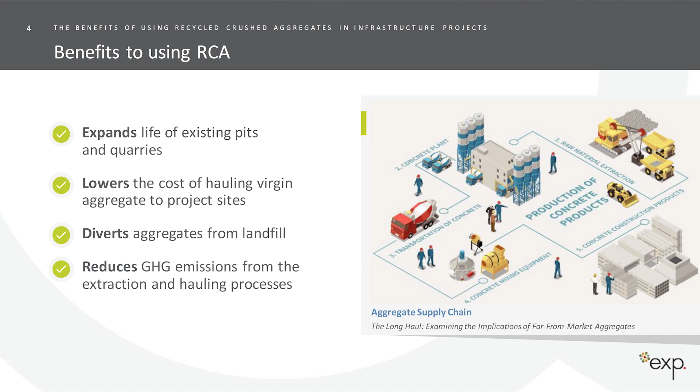So let's first talk about sustainability benefits. You had already pointed out that multiple articles discuss the limited amount of natural virgin aggregate. So whether it's the impacts of a quarry being shut down, or a couple articles I read about non-renewal on leases, so they're just not going to renew the lease on the quarry. But the fact is that no more material could come from some of these pits and quarries, or that we do have to source them from farther away, which is going to increase the transportation costs.

So those same studies actually pointed to the availability, and it's a lot closer for the location of crushers or suppliers who do have RCA readily available to transport to a construction site. So now you have this recycled material. It's at a location that is much closer to your site, and that gives you multiple paths to reducing those critical greenhouse gas emissions for the full life cycle of the material and the process.

So we also add to the list of benefits diverting aggregates from the landfill, because usable quality construction and demolition waste, so that's C&D waste, we really need to redefine that when we're talking about it in this context, because sending materials from a demo to a landfill is essentially sending aggregate to a landfill. So we have to really redefine that when we're talking about this in this initiative.

So here's where I... within the sustainability world, you hear a lot of talk about greenwashing, and it's because people put boundaries around things, and they'll say, well, I'm net zero for this little boundary. But it is important to understand the boundary in the context of how we present these results. When we get to the very end, you'll start to see what the conservative estimate for savings is.

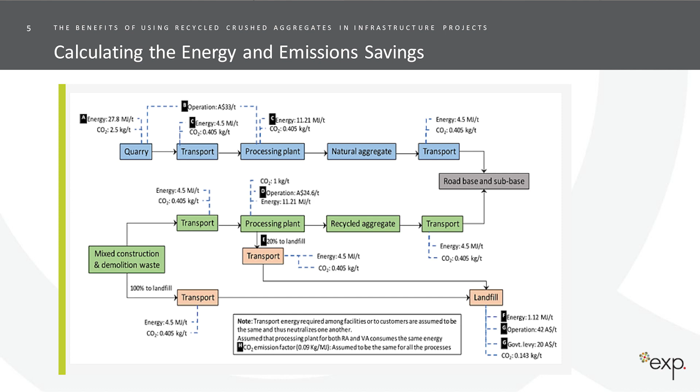But the reality is, to make the calculations work, you still have to get the aggregate from somewhere. So everything on the left-hand side, we've eliminated from that saving because it's too variable. We've assumed that whether it's from a quarry or from a demolition site, the material still needs to be transported to the processing plant. So that is going to be a variable, and we didn't want to say that it's always going to be better for one or the other. Based on our research, it generally leans more favorably towards RCAs. But again, as it's variable, we wanted to exclude it from our calculation.

And then similarly, from the plant to the construction site, it still has to get there. All of the studies have shown that the crushers can either be on site or they are closer to locations. But again, it has been considered the same, and it's been negated from the calculations and the savings that we do project later. So here are some of those transportation values we like to see.

So this is from an OSSGA report using the map of the quarry locations and determining the average distance from source to site. So for every kilometer traveled by the fleet transporting the aggregate, it's nearly 2,000 liters of diesel fuel consumed per day, and that's about 5 metric tons of CO2. The study did show quarries are between 35 and 75 kilometers from the site, which seems to be about the average.

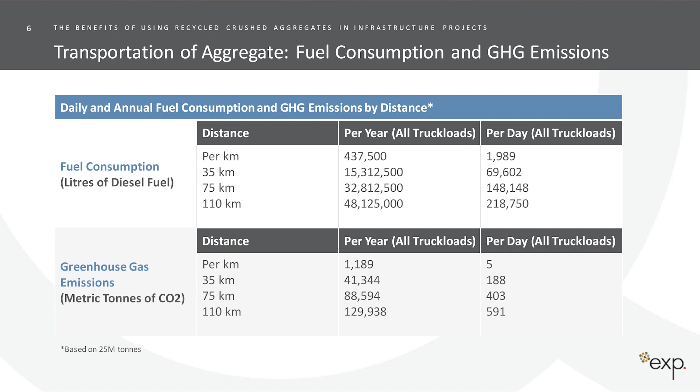So when you start to look at what the impacts are from fuel consumption and greenhouse gas emissions, it's anywhere from 69 to 148,000 liters of diesel fuel, and then the CO2 emissions are about 188 to 400 metric tons per day. So think about that. That is per day, the transportation of this aggregate to the sites.

So with an understanding of the sustainability benefits, we wanted to dive further into the use of the materials from a quality perspective, and this is where my geotechnical team and our testing teams came in. And then also looking at the standard specifications and what is actually being used and what is defined for Gran A, Gran B types 1 and 3, and then Gran B type 2.

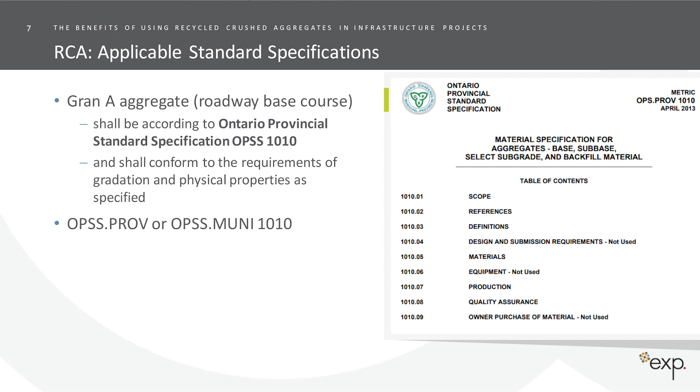So from the municipal spec 1010, these are both from 2013. I know other areas of the spec have been updated, but right now both versions still reference April and November of 2013. And you'll see that Gran A is up to 100% RCA and up to 30% RAP. And then the same goes for Gran B types 1 and 3. Type 2 does not allow recycled material.

And then when we look at the provincial spec, 1010 also does not specify the RCA content for Gran A and B types 1 and 3, but does allow up to 30% RAP, and that's that far right column for you. And then similarly, Gran B type 2 does not currently allow recycled material at all.

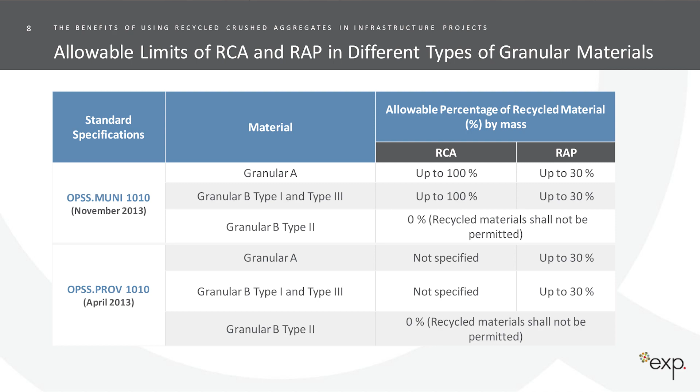So the good news. We have these really great recent examples of the use of Gran A materials in multiple highway sections of roadway. Ranging from 1,000 to 47,000 tons, there are projects large and small. And Gran A RCA still came in as an economically viable solution. And we'll show you in the next series of slides the estimated cost savings when we actually go to that recycled material versus the use of the natural aggregate.

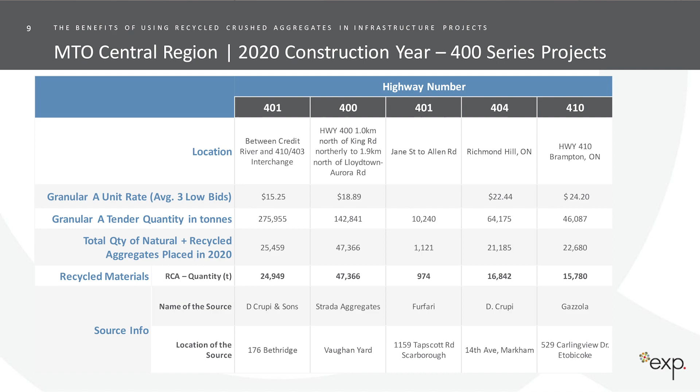So the next grouping of slides are just some project examples, and we really want to highlight the key metrics and point out the benefits that you'll see here. Highway widening, including the center barrier wall replacement from Major Mackenzie Drive to King Road. So this is a project, Highway 400 from 2017 to 2021, and recycled aggregate was used to replace both the Gran B and Gran A aggregate, with a total quantity of 300,000 tons and a $1.2 million cost savings. And you can see that distance from site. So I'm gonna talk about cost savings again.

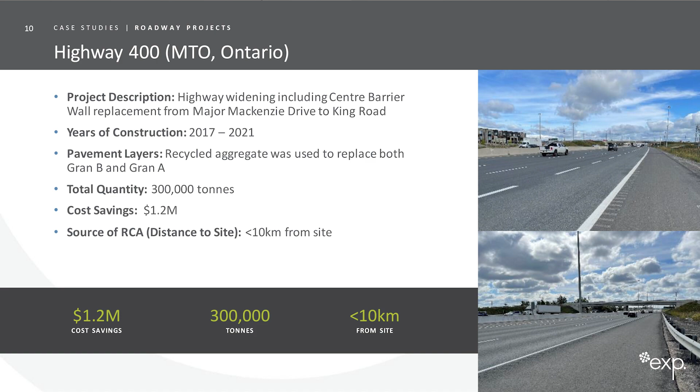If it's not affordable, it's not sustainable. But when you start to look at this, you have to start looking at that transportation value. Because one thing that this study didn't talk about is the cost of carbon. And in the future, if you are going to be limited to emissions from a project or a site and you go over that threshold, we're starting to see that you may be penalized because you've exceeded your carbon values for a project.

The value varies from anywhere from $50 to $205 per ton is what we're seeing. So just to put that in perspective, when you start to look at why we keep showing the distance from the site, it's because those transportation emissions are probably the largest factor that you'll see throughout these slides.

So we can even go back in time. Now we're looking almost 50 years to the Edens Expressway in Chicago. This was the first major US urban freeway that was completely reconstructed from scratch. And it was also the largest highway project on which concrete recycling had been used up to that time.

So the Illinois Department of Transportation used RCA in the base layer and fill applications, and it was nearly 350,000 tons of old pavement that were crushed on site, with about 85% of the RCA being used in those fill areas, and 15% used as a 3-inch unbound aggregate base. The asphalt treated base and the 10-inch continuously reinforced concrete pavement were also placed over the RCA base.

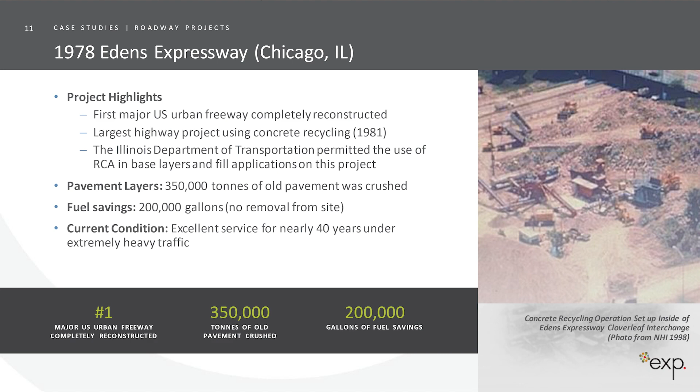The estimated fuel savings, as you can see here, is 200,000 gallons that would have otherwise been consumed in taking the crushed old roadway off-site and then bringing in new virgin aggregate. So it was about 200,000 gallons of diesel fuel that were actually estimated to be saved through doing this process.

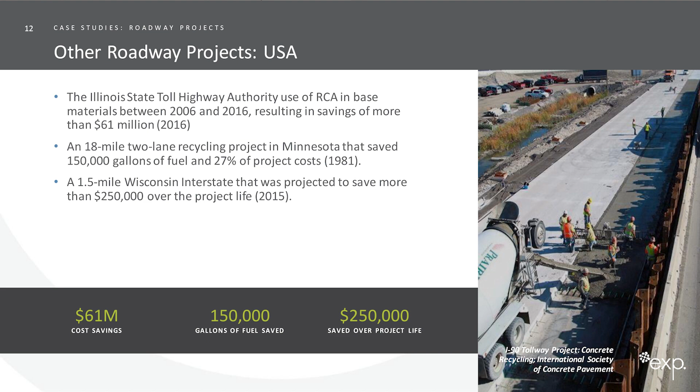So sticking with just a couple other roadway projects, the Illinois State Highway Authority used RCA in base materials for a decade and saved more than $61 million. So that's a pretty incredible and impressive savings. An 18-mile project in Minnesota saved 150,000 gallons of fuel, and about 27% in project costs. And then finally, a 1.5-mile roadway in Wisconsin projected savings of $250,000 over the project life.

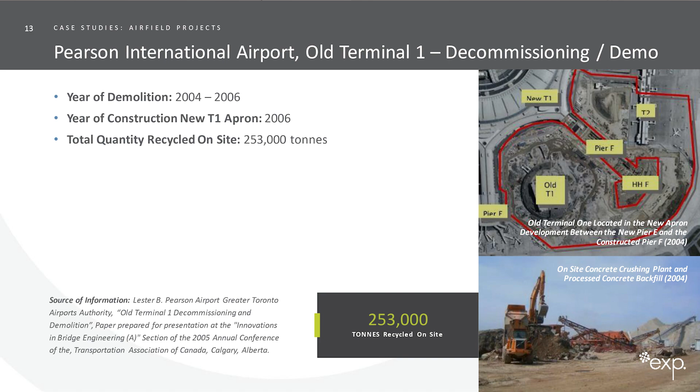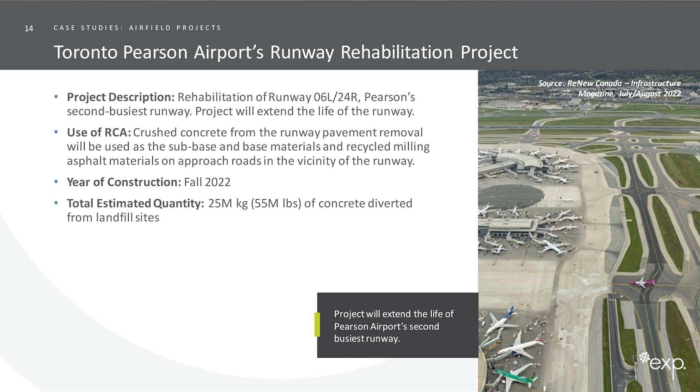But I really want to point out, I have a quote here. The sheer volume of concrete used in the project added up quickly. An estimated 39,000 cubic meters of concrete was used to reconstruct the runway, which is the equivalent of 16 football fields. And when you start to talk about it in that mass quantity and how much you have saved by reusing that concrete, it's very, very impressive.

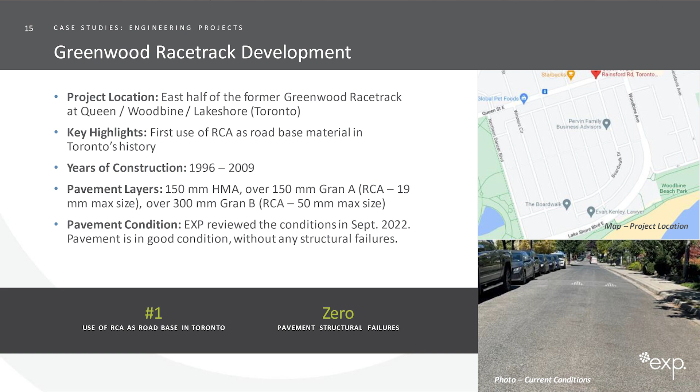So we can go back further into the mid-90s, where the first use of RCA as a road base material in Toronto's history was reported. The picture on the bottom right is from 2022, and you can see that there were zero structural issues in the pavement. We actually did the condition assessment. Pavement is still in good condition, no structural failures, and it has been proven to stand the test of time, and I keep saying, traffic as well.

So from residential roadways to industrial subdivisions with heavy traffic, these engineering projects continue to uphold conformance with specs and withstand the test of weather too. So we've talked a lot about traffic, but weather is also a concern. Runoff from ice to storms.

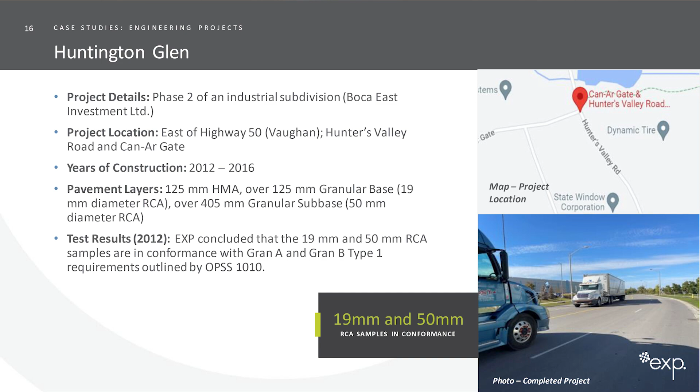And then you can see that this construction was over 4 years, in different layers of pavement and the different types that were used. But we did do a test. This was back when it was originally constructed, and concluded that the 19 millimeter and the 50 millimeter RCA samples were in conformance with the specifications at the time.

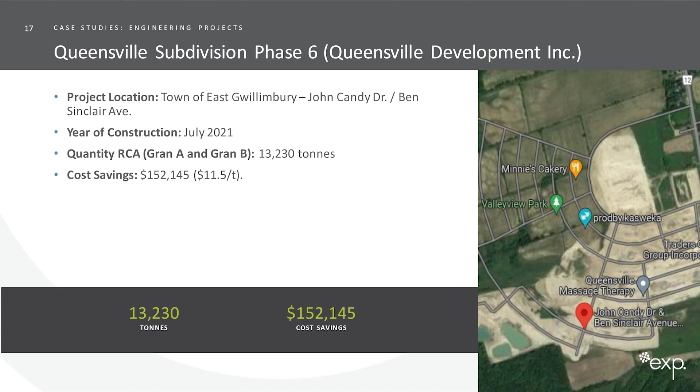So in this example, we really had great information not only on the quantity used, but then the cost savings per ton. So we've talked a lot about quantity. Now we've started to talk about greenhouse gas emissions, getting into that financial information. So the quantity of RCA, Gran A and B, was 13,000 tons, which was split about 33%, 66%. And it actually estimated $150,000 in cost savings by switching to that material. And that equated to about $11.50 per ton.

And then finally, I just want to wrap up with a couple ongoing projects. So this is the Finch light rail, a P3 project designed here in Toronto where RCA is used for various applications. So not only is there a cost savings, but again, we start to talk about those greenhouse gas emissions and keep reiterating the distance from the crusher to the project versus the distance from the quarry. So in this instance, again, it was less than 10 kilometers.

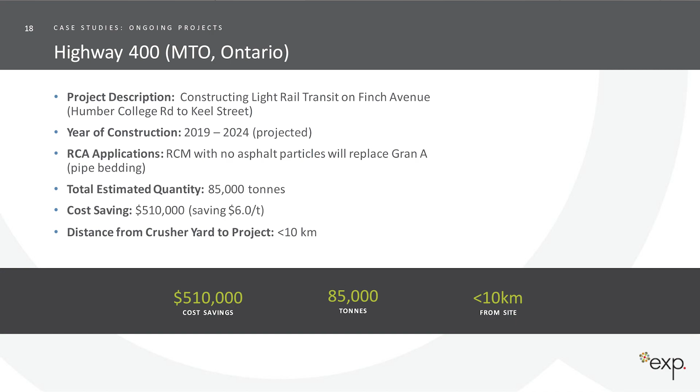And then the contractors were also, I have a little note here in my slides, permitted to dispose clean concrete and asphalt locally. So it also saved on the disposal, transportation costs, and the emissions.

So the projects that we presented were from our literature review section, meaning that was all the history. So we wanted to start the study and say, has there been history of use? Has it withstood the test of time? Now we're going to go and do our own samples because we want to do our own research. We want to ensure that we had our own data to continue with our study.

So in August and September of 2022, we collected 9 different samples. 6 were Gran A, RCA 1010, and 3 were Gran A native. The yard addresses and sample collection dates are listed on the table for reference.

And can we leave these slides behind for everybody? I just don't know if they're too small for everybody to see.

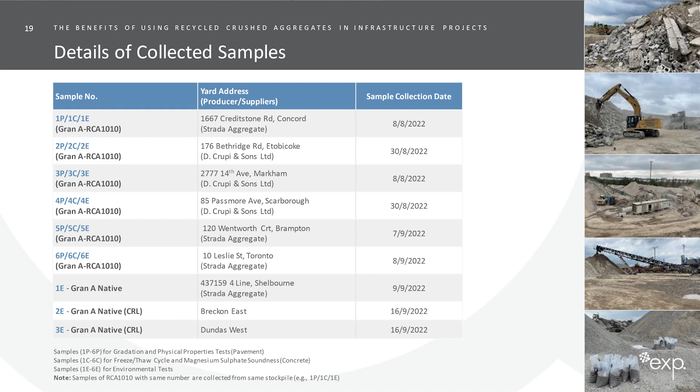But they are listed on the table for reference, along with samples that were taken from each of those piles. We did document with photos that are included in the full couple 100-page report that was associated with these studies.

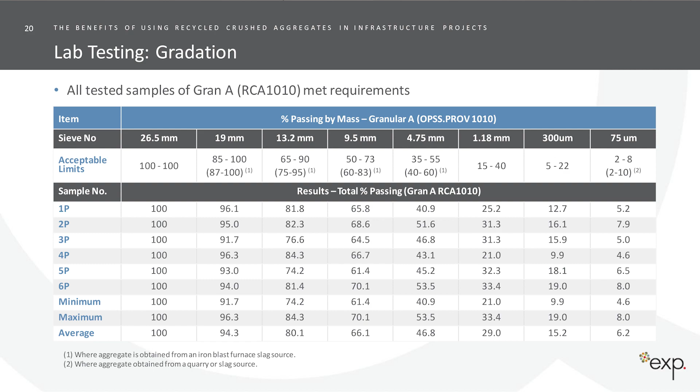So after gradation, there was also lab testing for the physical properties as compared to the specified values that are also listed in this table from the specification. So we are engineers, and just because it wasn't in the spec didn't mean we didn't want to test it, so we added a few extra in. And if it didn't have thresholds, we just made note of what the values were, because we love numbers, and the more data, the better.

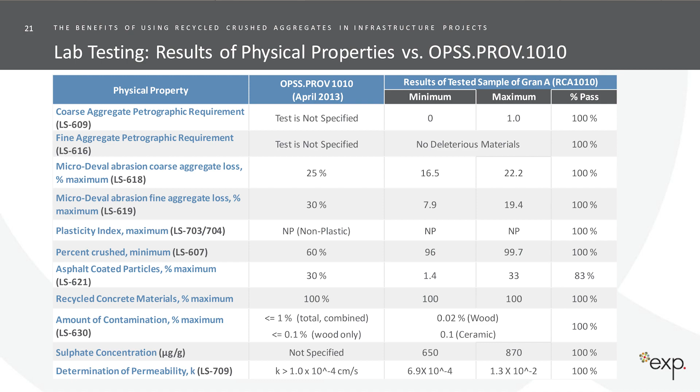So I know that we are coming up on questions here, and I want to wrap up our presentation to come back full circle to what my passion is, which is the sustainable aspects, and the importance of this circular economy and life cycle analysis to promote this cultural shift from use of natural aggregates and natural materials to recycled materials.

So I talked earlier about those calculations for transportation, and that the transportation numbers were this wild card because it's a variable. It's based on where your project is. If you happen to be right next to a quarry, then maybe the numbers work out in favor of that. But we did choose 4 projects where we have the actual numbers, how far they were from the crusher and also to the quarry, and wanted to do a deeper dive into the analysis. So let's check it out.

We talk about the cost benefits. These 4 project examples, the average dollar per ton savings is about $8, so whether you have 7,000 or 100,000 tons, you're starting to look at, across these 4 projects, $1.4 million in savings just from these 4 examples. And then the distance from the crusher to the site was always closer than the pit to the quarry. So in the Brampton example, it was 42 kilometers, and then in Vaughan over 100 kilometers. So you start to see the benefits from a cost perspective and then also the distance.

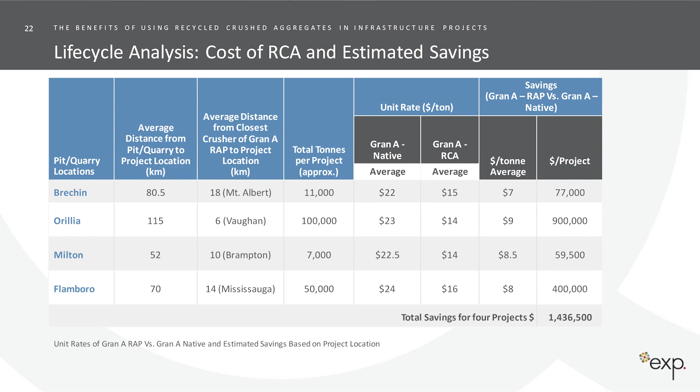But the breakdown of this chart is just to show the savings from its process energy and then the carbon emissions less those transportation. So that's just that middle of that flow chart. Concrete from C&D waste carried the lowest energy and emissions value per ton, with untreated material having the highest in both categories.

So based on this information, we can firmly say and predict that a project is going to have a 25% savings in energy per ton of aggregate and a 46% savings in greenhouse gas emissions. And that number is only going to go up if you prioritize having recycled aggregate as close to your site as best you can.

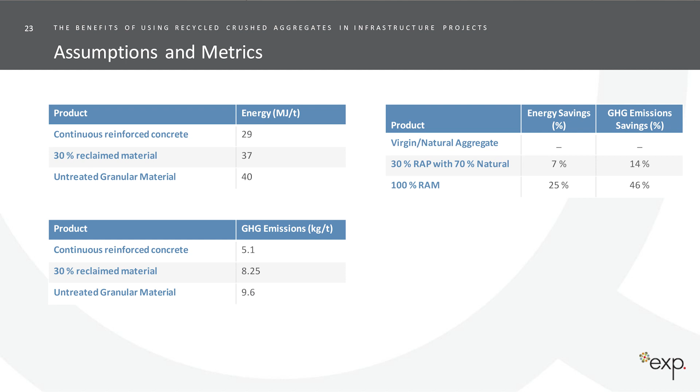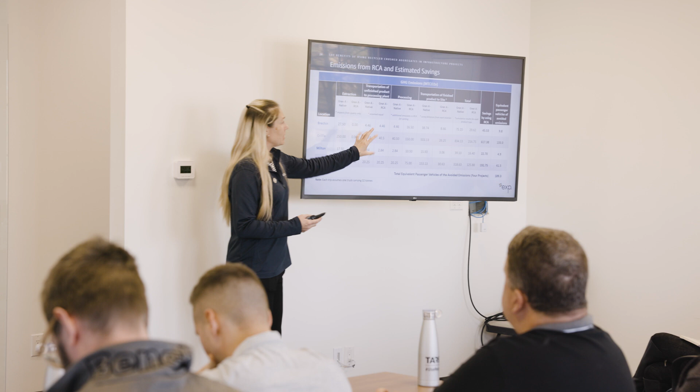And so this is exactly what we see. I took those 4 examples where I did a deeper dive and started to show the savings. So we knew the distance from the site. I'm trying to look, my eyes are so bad. So another interesting fact, I just want to point out that we didn't want to just make it work. If you look at the processing, you'll see that the RCA processing number is actually higher in every single case. And why is that?

Because not all construction and demolition waste is usable. So there is a heavier, intensive process at the plant to actually sort through that because we don't want it to impact quality. You can't just throw everything in there when you have drywall and all this other stuff. So even with that, we still see it's over 60% in every scenario, based on the 4 examples that we used.

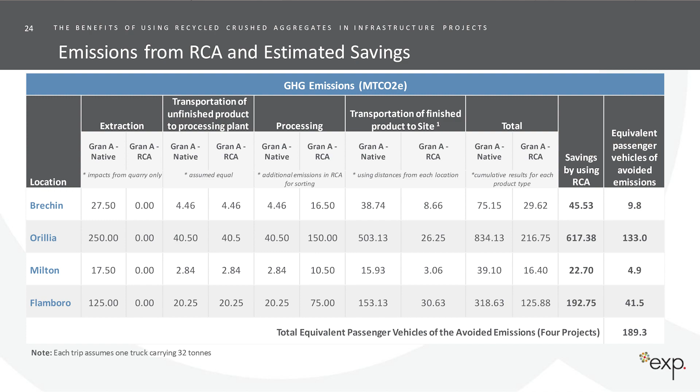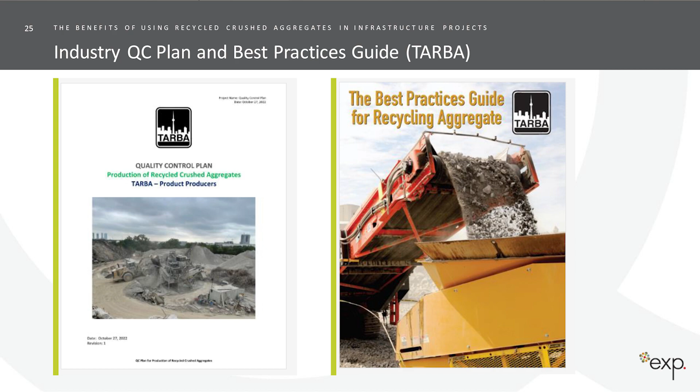And I like to throw in a little number: it's taking 189 passenger vehicles off the road, if that helps people with what that actual metric ton savings equates to when we talk about emissions. So we do want to point you to some additional reading material, which is the quality control plan for RCA, and also a best practices guide for recycling aggregates, both by our partners TARBA. And our report can be found on TARBA's website, as I keep mentioning, and we can send you a link to that.

So just in summary, we've established that there's a quality product available, with the implementation of a thorough QA/QC plan. We have to have a thorough QA/QC plan in place to make sure that the product you're getting to the sites is actually usable and it's not going to fail. The use of RCA in infrastructure projects throughout the GTA and Ontario should be highly encouraged, and we need to keep being advocates for this initiative.

And if municipalities lead the way, standing behind their environmental commitments, others are going to follow. So we all have to do this. We all have to be part of the solution and no longer the problem. The product has proven to stand the test of time and weather. The first example we had was from almost 50 years ago, and it's still standing strong. And it's widely available, and it's economically feasible across the entire region, which has also been proven in our studies.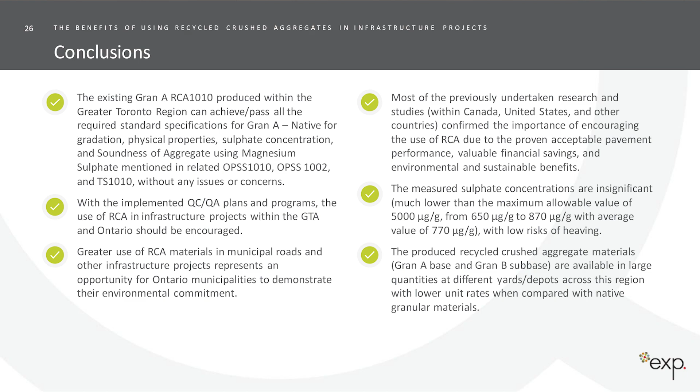So some next steps. Me being here is part of our next steps too. The report was issued in late 2022, and since then we've done a number of advocacy events with different municipalities, different cities, different conference events, but it's really just continuing to advocate and show these numbers because there's proof in the numbers. We've been actively circulating the QC template plan because, again, we keep focusing on quality. If the quality's not there, it doesn't matter if it's more cost effective. Then you're going to have to reinstall it, and that's not going to be cost effective.

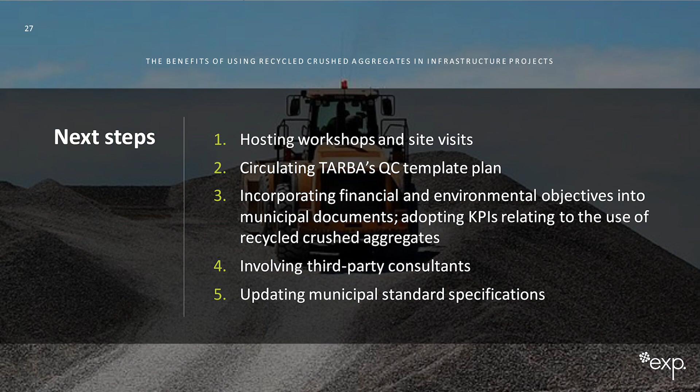And then involving third-party consultants. And then finally, that big one is updating the municipal specs, because far too often, again, as we were talking about, if it's not in the spec, we're not going to do it. If it's in the spec, you're going to have to do it. But it's going to take some advocacy to make sure that it gets into that updated spec that is now almost 11 years old. So we are doing our job, we are doing our part.